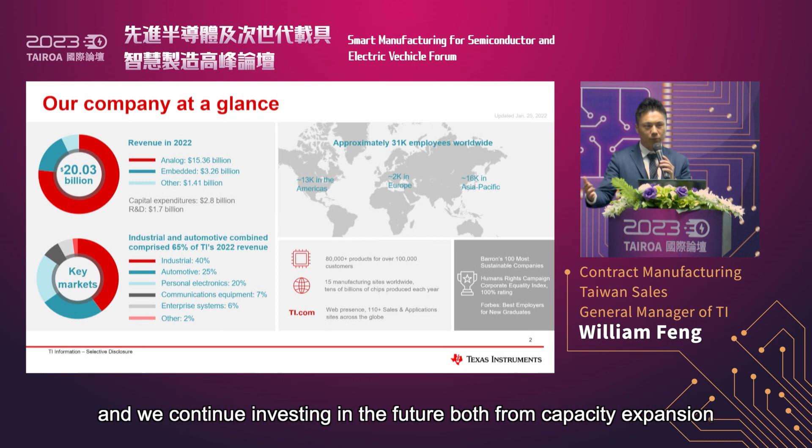Last year, TI ran 20 billion revenue, mainly from analog and embedded products. We continue investing in the future, both from capacity expansion and product technology expansion. We spent 8% of our revenue for R&D investment, and another 14% of our revenue into capital expenditure to enable the future.

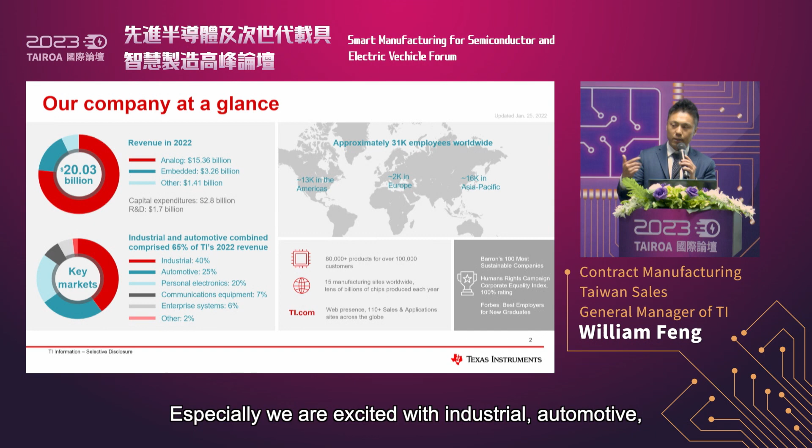We feel pretty good about the mix of business we have today, and we love the diversity of the market with our broad portfolio, from analog and embedded products. Especially, we are excited with industrial, automotive, enterprise, and cloud areas, just like the robotics or smart manufacturing we are talking about today, which is the trend of growth for the next decade. Meanwhile, we also invest across the markets where we see opportunity to grow and develop.

Earlier this year, maybe February 1st, we announced to the market that we will increase our capital expenditure to 5 billion per year this year and next year through 2026. People who know the market situation of semiconductors this year might feel like it's insane why you are spending a lot of money today.

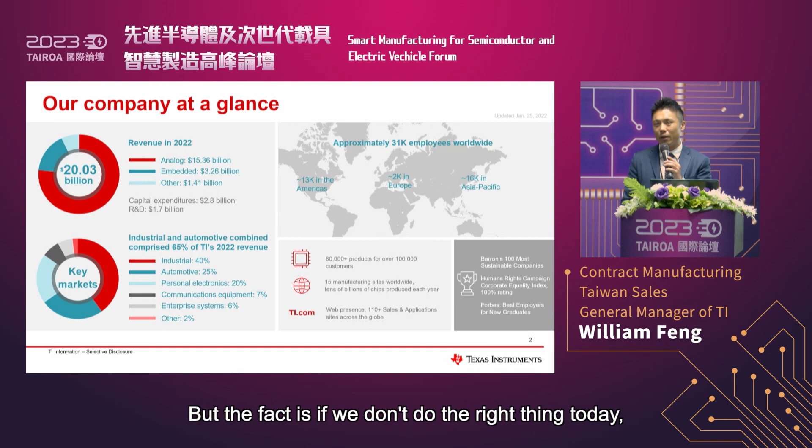But the fact is, if we don't do the right thing today, when we enable a new factory, the cycle time will need at least 3 years until it can deliver. So we continue investing in that, and actually we increased the capacity investment this year.

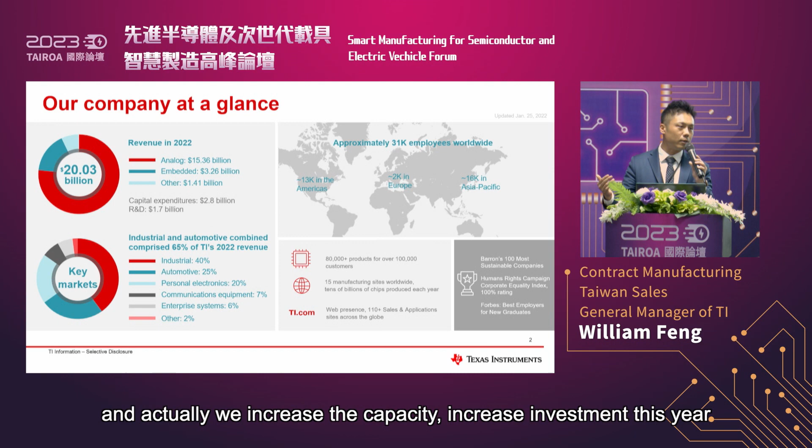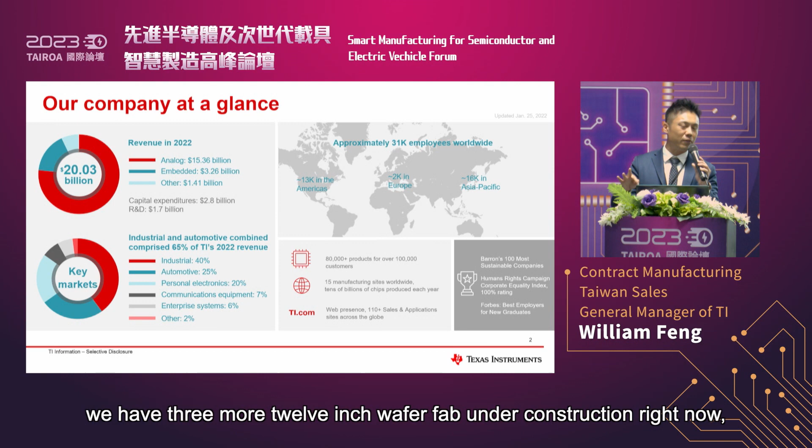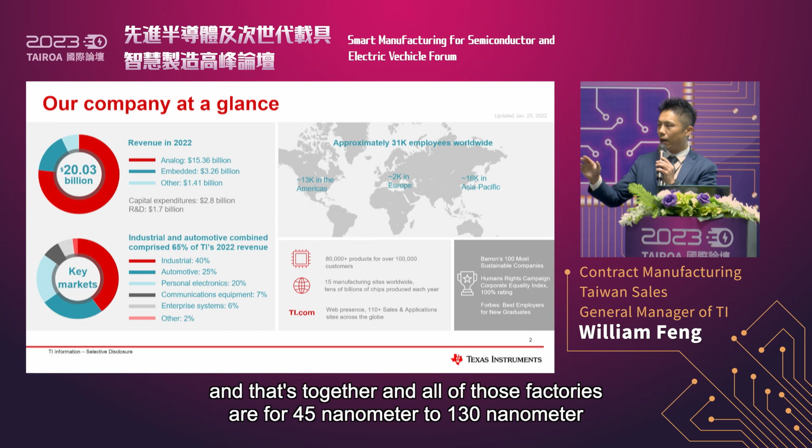We have 2 300mm wafer fabs just launched in production at the end of last year. We have 3 more 12-inch wafer fabs under construction right now, and another 2 12-inch wafer fabs in planning. All of those factories are for 45 nanometer to 130 nanometer, which is the process node we see with optimal cost, performance, power, and voltage level to enable analog and embedded products.

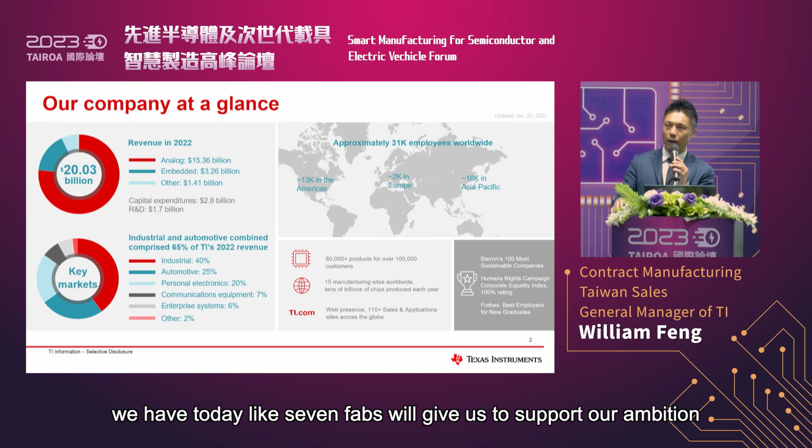Put together, those capacity investments we have today, the 7 fabs will support our ambition to become a 45 billion revenue company in 2030.

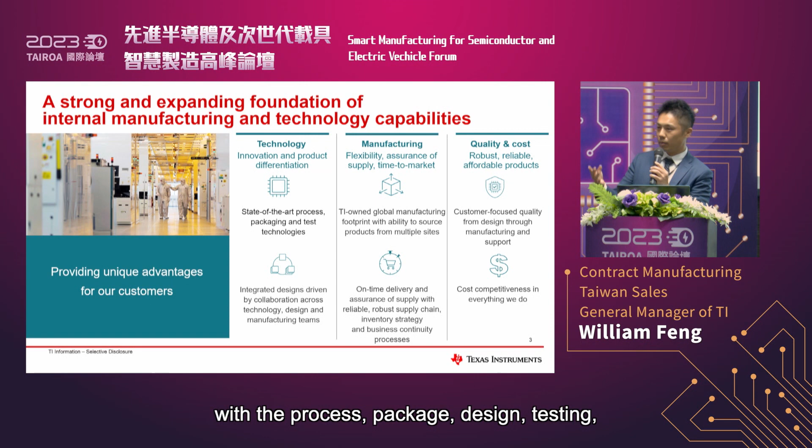And the expansion cannot just be at the capacity. We are expanding our foundation in technology and capabilities, with process, package, design, and testing, through all these efforts to drive innovation to enable a smarter, smaller, higher power efficiency, lower consumption, and more affordable semiconductor. That is what we are driving and developing.

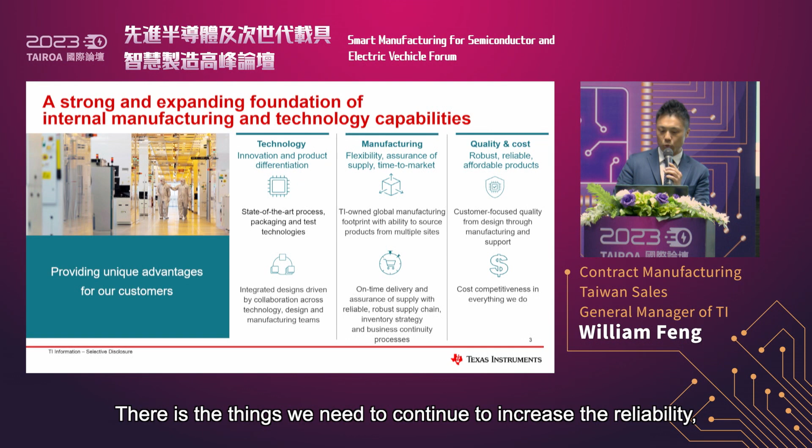With the capacity expansion, our goal is to build a flexible assurance of supply and time to market performance for our delivery and order fulfillment. And last but not least, the quality and cost. When we develop the technology, we need to continue increasing reliability and quality, and also make semiconductors more affordable to the market.

So today we talk about robotics and smart manufacturing. In fact, it's not a new thing in terms of robotics. 50 years ago, the first robot appeared in the world. That robot was good enough, precise enough, and performed well enough to help human beings increase efficiency in a factory, but it was also dangerous.

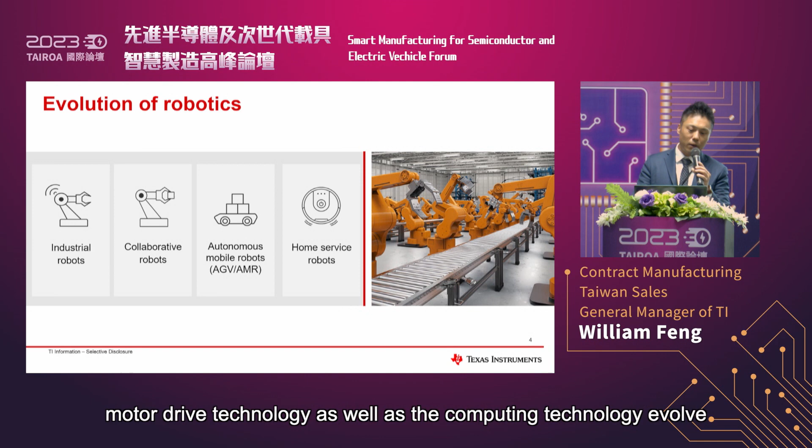With sensor technology, motor drive technology, and computing technology evolving to enable robots to be more collaborative, recently we also start to talk about AGV and AMR, with increasing capability in sensing, AI, and edge computing, enabling these robots to be smarter. Lastly, this innovation will not stop at the factory. Outside the factory doors, we already see smarter and better robots changing our life.

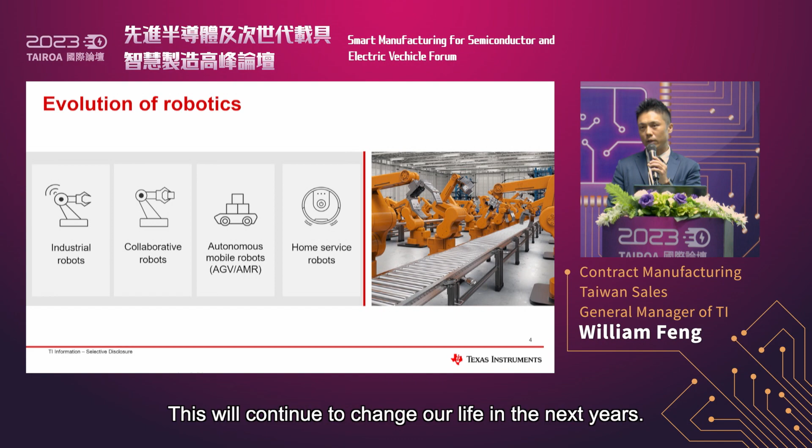We believe while this innovation continues to evolve, we can't even imagine how it will continue to change our life in the next years.

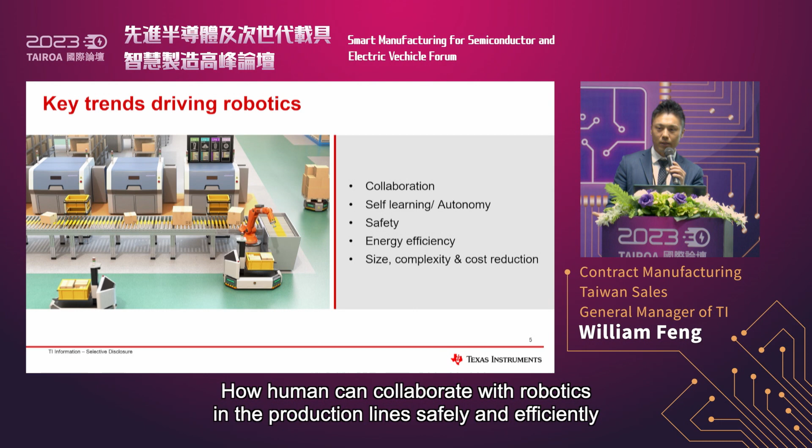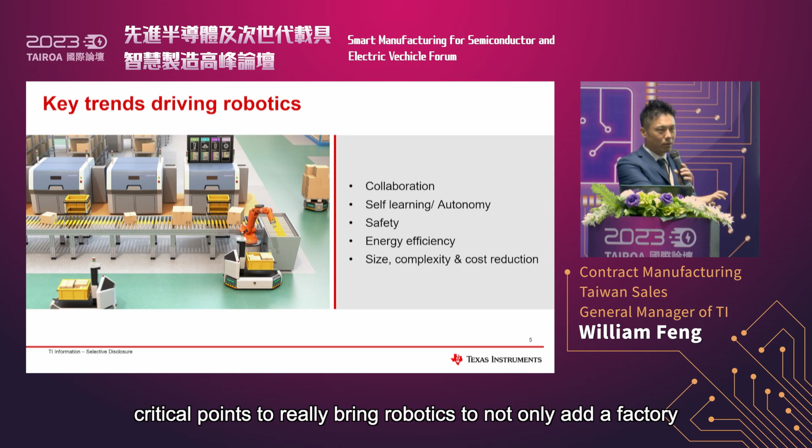There are 5 trends we are observing in robotics development. The first is collaboration, how humans can collaborate with robotics in the production line safely and efficiently. Second is self-learning and autonomy, driven by AI and edge computing plus the computing capability we've evolved in the world. Safety is certainly a must in the trend, and energy efficiency with the development of the battery, the BMS, and wireless connectivities is a trend that continues to evolve. Last but not least, there is size, complexity, and cost reduction. These are the critical points to really bring robotics not only to the factory, but everywhere that can help human beings down the road.

Right, so let me pause here. I will introduce Matthias, our expert on robotics from Germany, to give everybody a further talk on the trend of the technologies here.

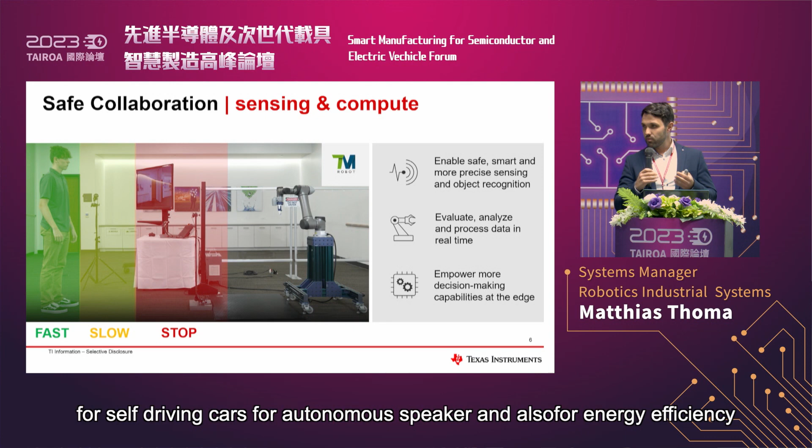My name is Matthias, and I'm working in TI in the so-called robotics systems engineering team. TI itself is a semiconductor company, so we will not develop robots ourselves. I want to talk about the products TI develops that enable current robotics and also the future of robotics. A lot of the trends we heard earlier for self-driving cars, for autonomous vehicles, and also for energy efficiency are also similar to what we need for the next generation of robotics.

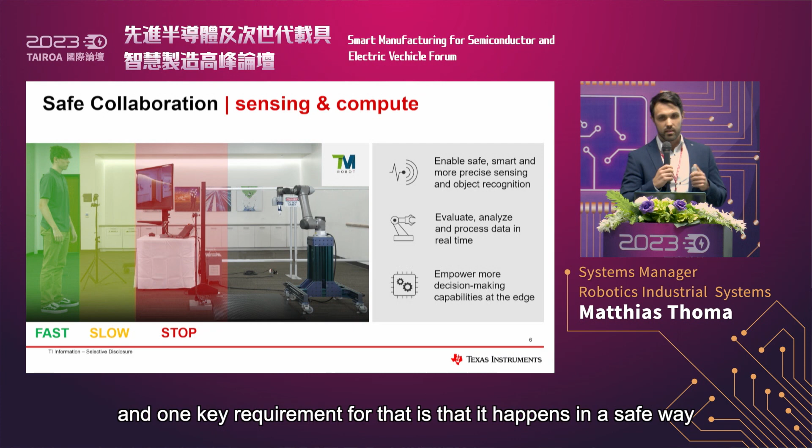So the first topic I want to talk about is collaboration, and especially safe collaboration between humans and robots. I think we all imagine in the future, the long-term case will be a factory where almost no human will be needed. But on the short term, the first step will be humans working alongside robots. One key requirement for that is that it happens in a safe way and also in an efficient way.

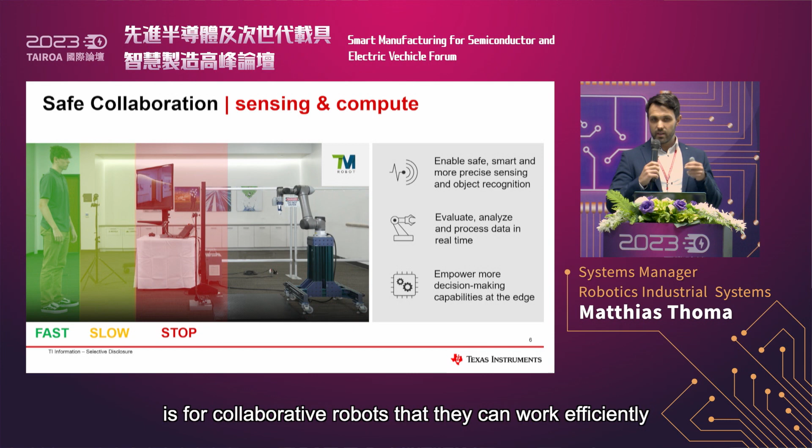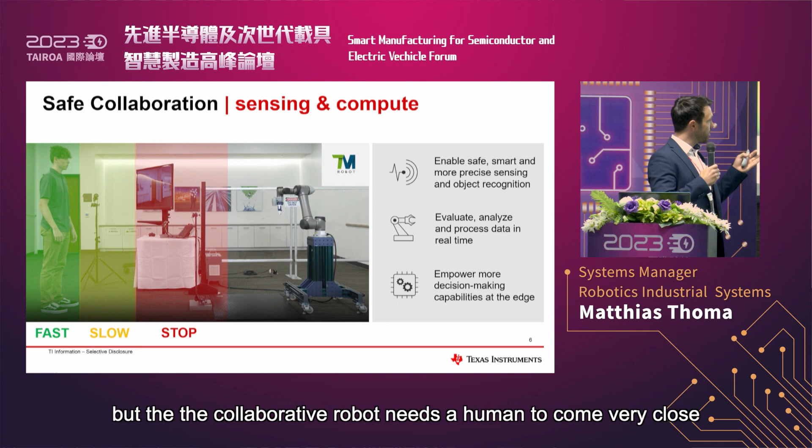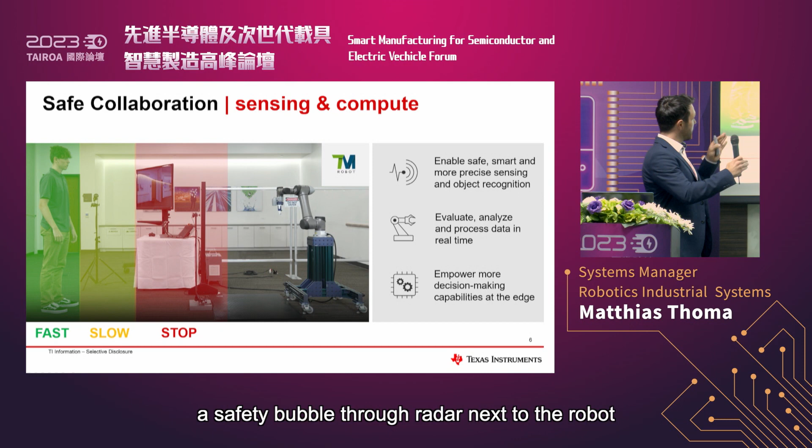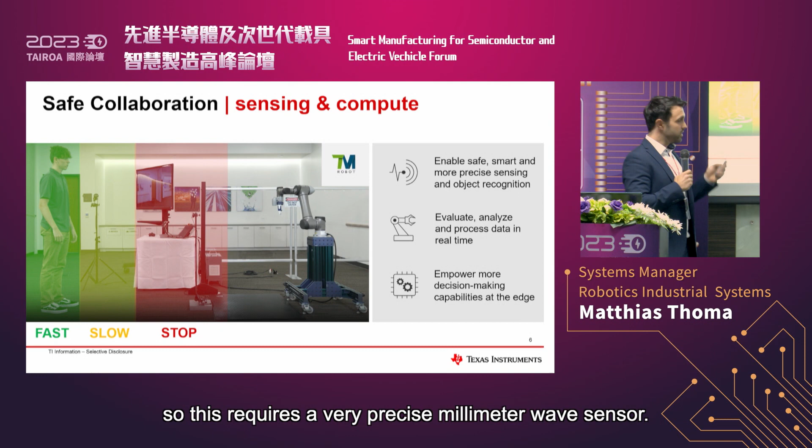One challenge right now is for collaborative robots to work efficiently, at high speed, and close to humans. One example here is the sensor technology we are using, a millimeter wave radar. In the past, the first generation of robotics was surrounded by a cage, but a collaborative robot needs a human to come very close, and we enable that with millimeter wave radar. What we do is create a safety bubble through radar next to the robot, defining different zones in front of it. There's a safe area when the human is far away, and as he walks closer we can slow down the robot, and only when he's really close will it actually stop. This requires a very precise and safe millimeter wave sensor.

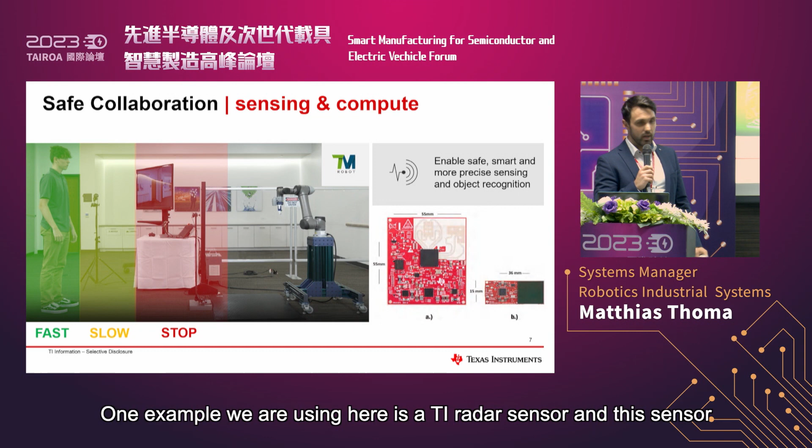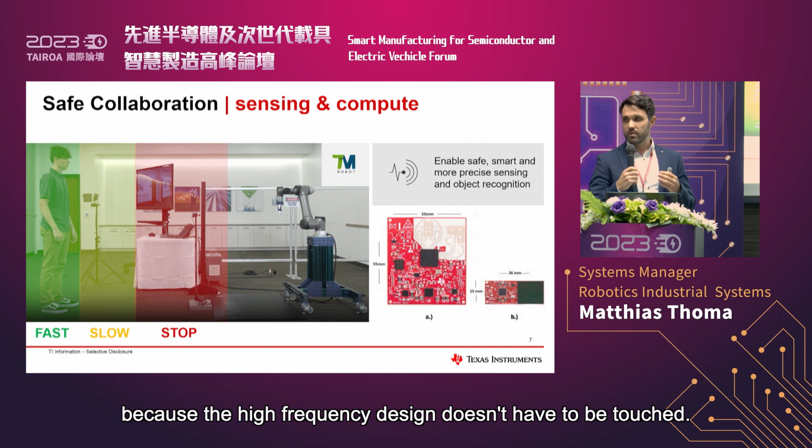One example we are using here is a TI radar sensor, which also comes with antenna on package options. That means it's easier to deploy because the high frequency design doesn't have to be touched—you can just have the antenna integrated. At the same time, the sensor comes with safety certifications, and we are running it on efficient processes so it comes at a lower cost in the future.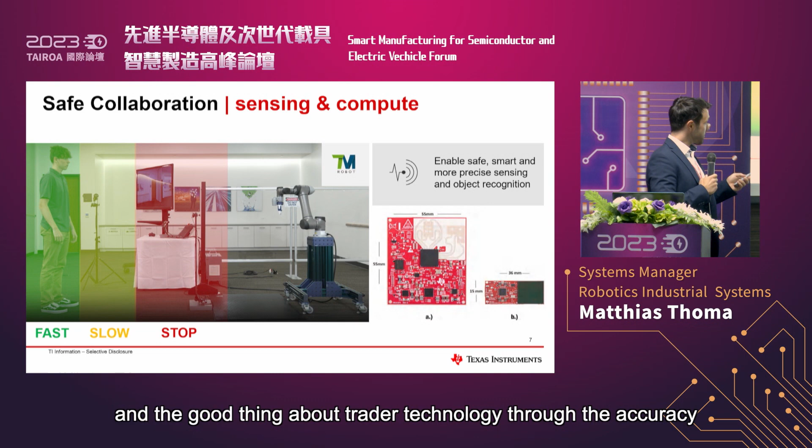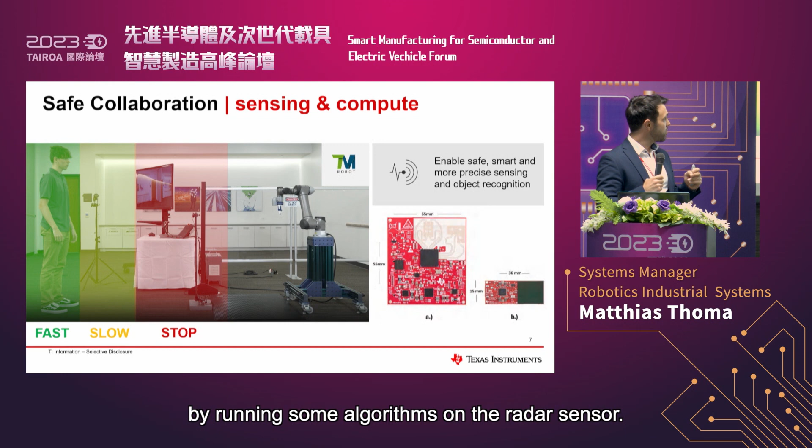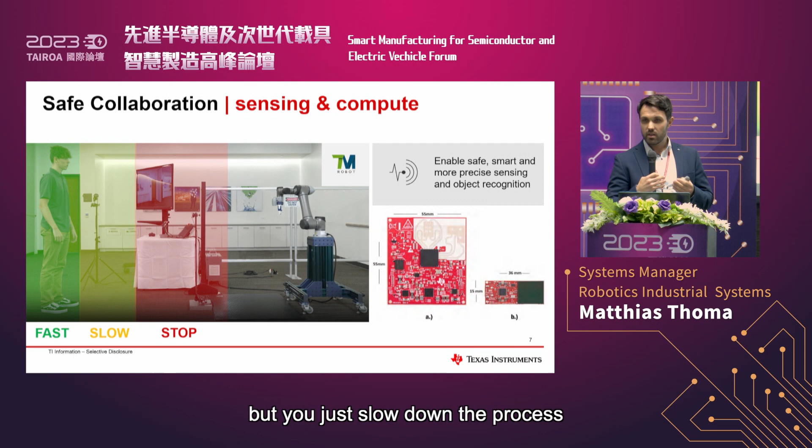The good thing about radar technology, through the accuracy you can get out of a radar sensor, is that you don't only detect if an object is coming closer, you can also differentiate what kind of object it is. By running algorithms on the radar sensor, you can differentiate if the object is, for example, a human or another robot. That means you can also increase the efficiency of your production, because you don't slow down the process when another robot comes close, but only when a human enters the area of the robot.

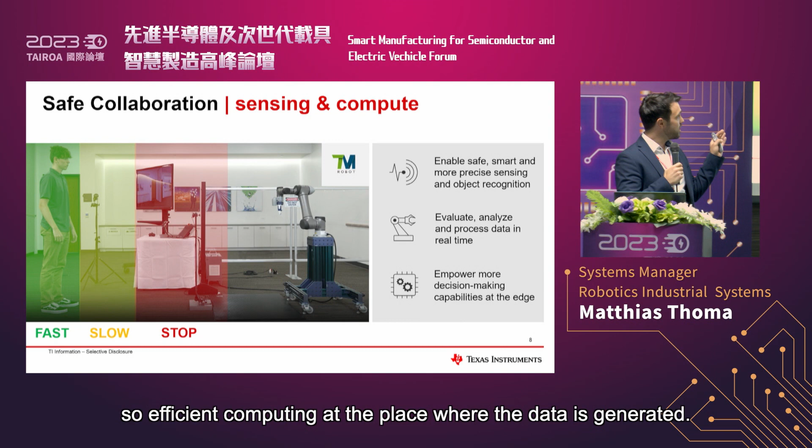Next to the sensing technology, radar is just one example. Processing is also needed, so efficient computing at the place where the data is generated. More new sensors also generate more data, and this data needs to be processed efficiently. So another big topic TI is focusing on is edge computing and AI computing.

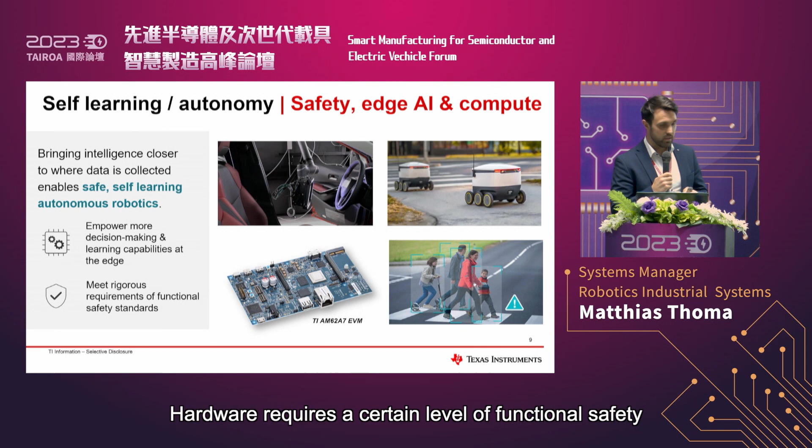And all of that for robotics has to happen safely. That means the processes and algorithms, but also the hardware and system level hardware, require a certain level of functional safety. And AI compute, we can already see today, has a lot of use cases for robotics.

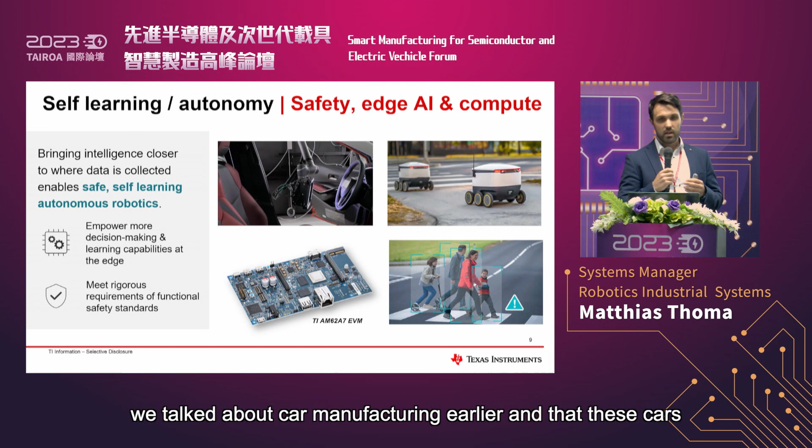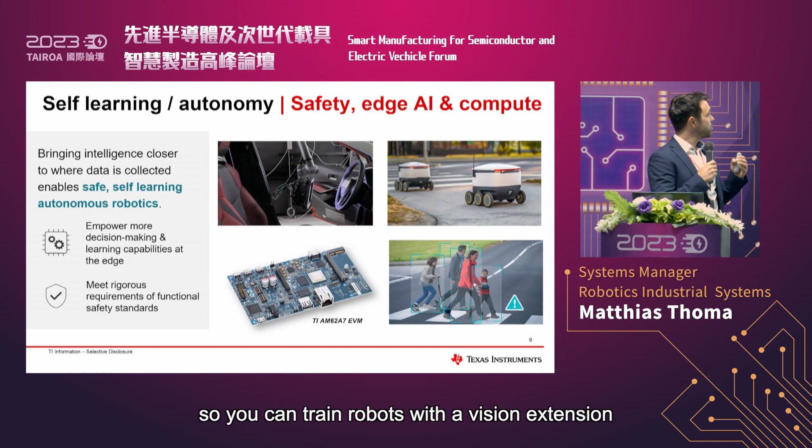One example we are showing here is visual inspection. We talked about car manufacturing earlier, and these cars need to be manufactured in a very accurate and precise way, so the inspection of the cars has to be done precisely too. You can train robots with a vision extension to do the inspection of the car, and ensure with the robots that the quality of your manufacturing is at the right level.

But it will not stop at just vision inspection, it will go beyond that. Robots will in the future be more and more able to perform tasks autonomously and on their own. This will be similar to self-driving in the future, when an autonomous robot can also drive on its own. And all of that also requires a lot of processing power.

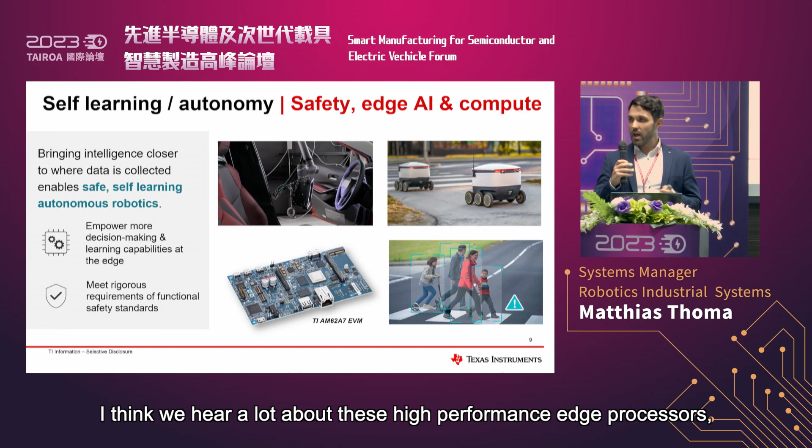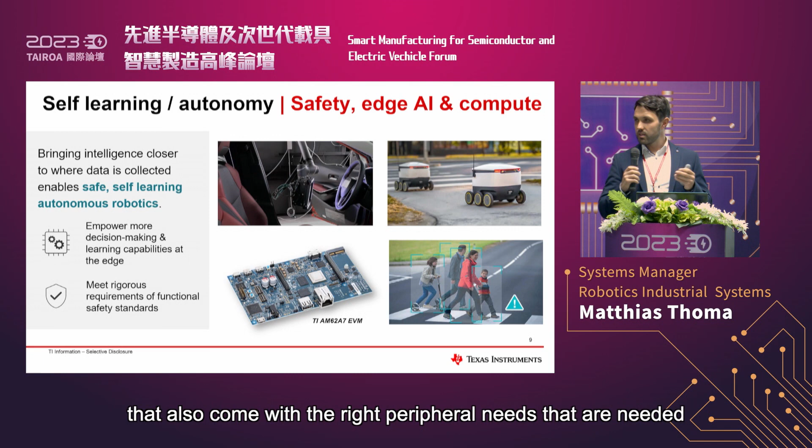The TI solution we are offering here, we are showing an example of one of our edge processor families. We hear a lot about high performance edge processors, but there are also lower performances that need to be computed at an efficient power level and a good cost structure. So we are offering a scalable family of edge processors that come with the right peripheral needs for connecting different kinds of sensor types for robotics.

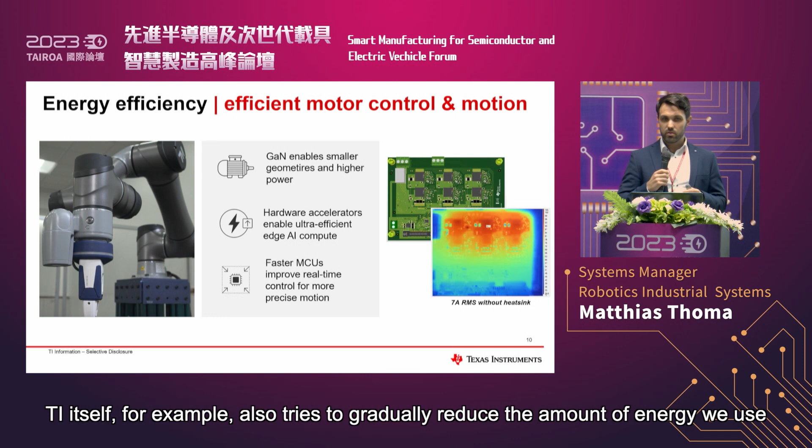Another topic affecting robotics is energy efficiency. We talked about reducing the greenhouse emissions of the cars, right? It also means reducing the greenhouse emissions of the factory itself. Since more robots and more machinery are installed in factories, that means these machineries need to reduce energy consumption. TI itself, for example, tries to gradually reduce the amount of energy we use in our semiconductor manufacturing, and we also use a lot of robots, so getting more efficient robots will help us decrease the energy usage of the manufacturing.

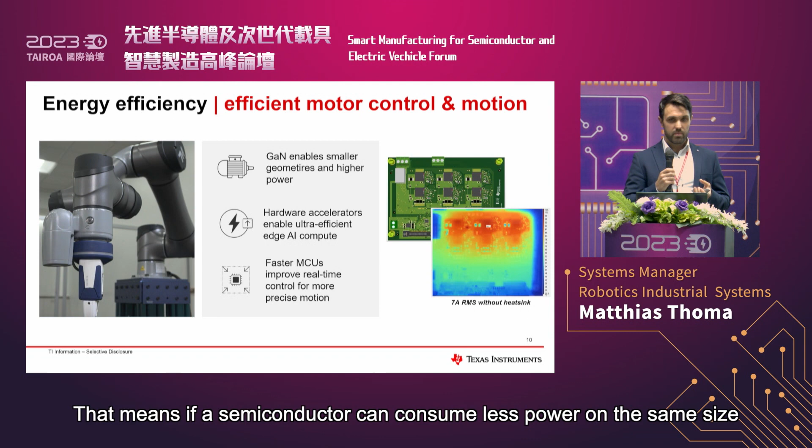Energy efficiency, on the other hand, enables new types of robotics and also new architectures of robotics. If a semiconductor can consume less power in the same size, or if I can reduce the size of my semiconductor package needing the same power, or if I can remove the heatsink, I can also build new architectures of robots or build my robots more efficiently.

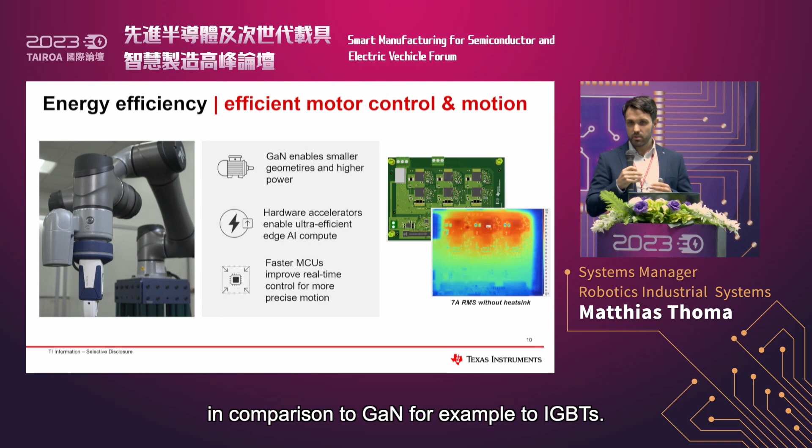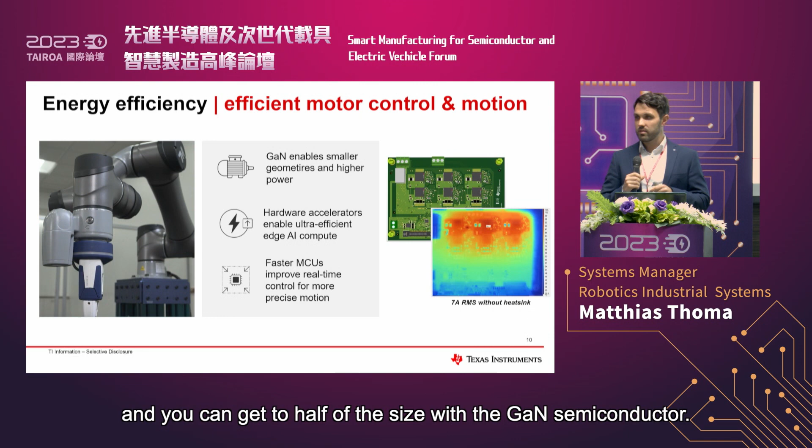One example we are showing here: earlier we heard about IGBT and GaN, and TI is investing into GaN technologies, which can be used in different areas in robotics. One is the inverter stage, the motor. Compared to IGBTs, GaN can reduce switching losses by 80%. At the same time, compared to a classic silicon MOSFET, you can get to half the size with a GaN semiconductor. This enables much smaller power stages for the robots.

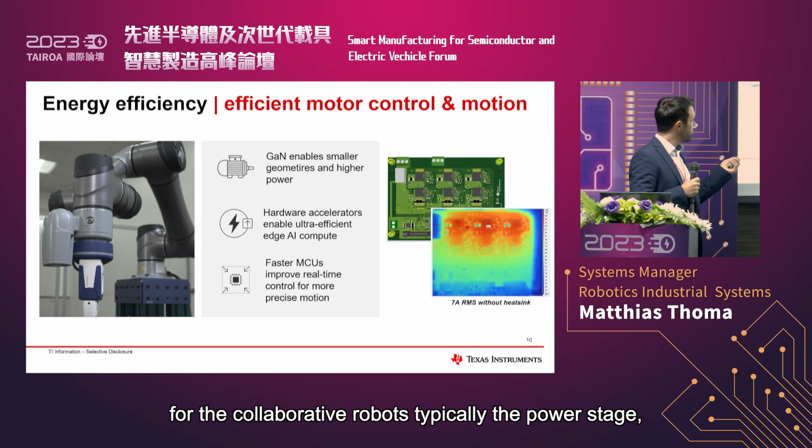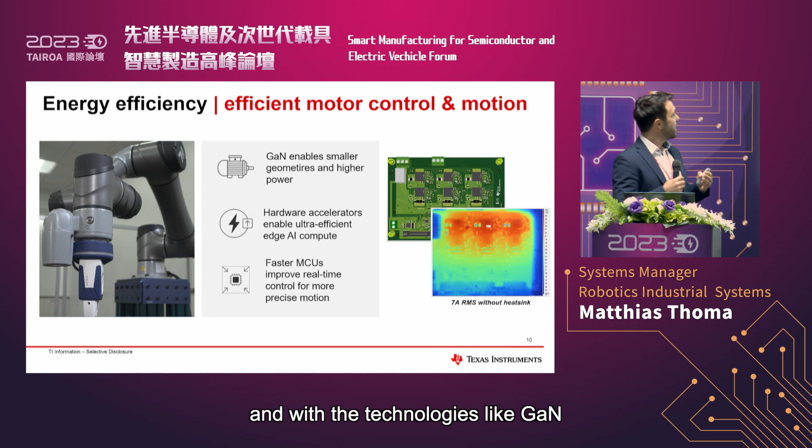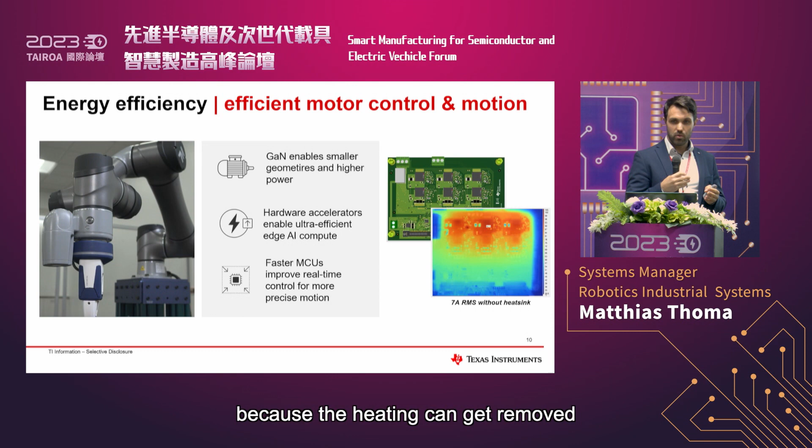For example, for collaborative robots, typically the power stage is within the joints of these robots, so there are motors in each joint, and also the power electronics is in the joints. With technologies like GaN, heavier payload robots can be built this way, and the cost of these robots can be reduced because the heatsink can be removed, or the amount of weight the robot needs can be reduced.

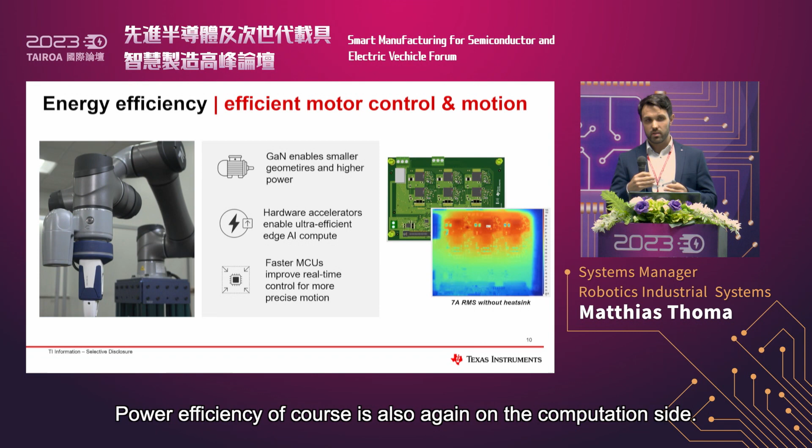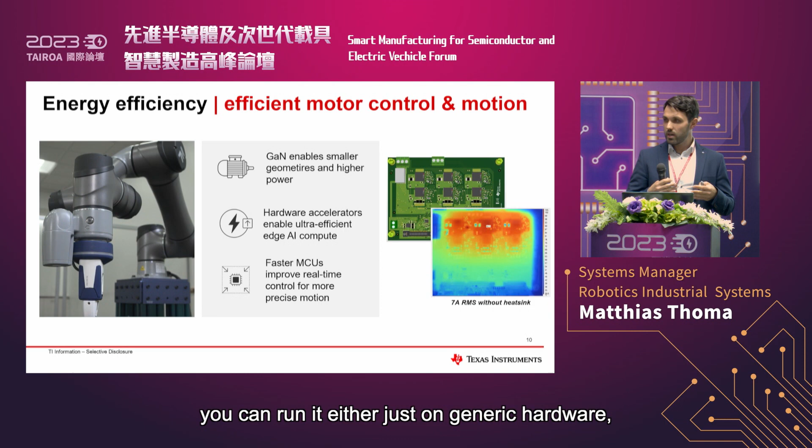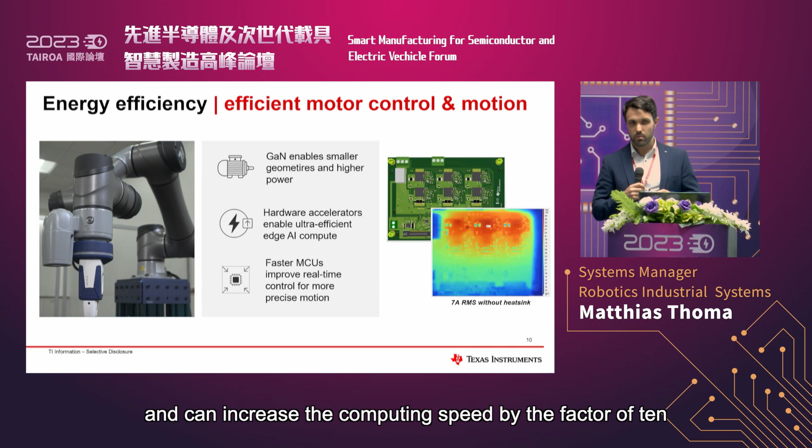Power efficiency is also important on the computation side. We talked about AI models, and for the AI model you can run it either on generic hardware, or there's specific hardware built to run AI efficiently. We integrate dedicated AI accelerators on these edge compute processors that can reduce the computing power and increase the computing speed by a factor of 10.

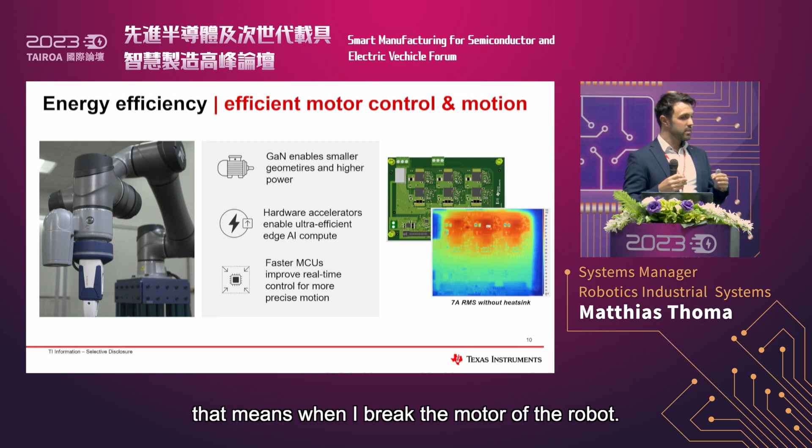Another area where GaN can be used is regenerating the energy of the robot. A robot performs a lot of fast movements with starting and stopping. With GaN you can build bidirectional DC-DC converters. That means when I brake the motor of the robot, similar to braking the motor of a car, I get regenerative energy from the motor, and this energy I can reuse and feed back either into a big battery or into my energy grid. This increases the power efficiency of the robotics itself.

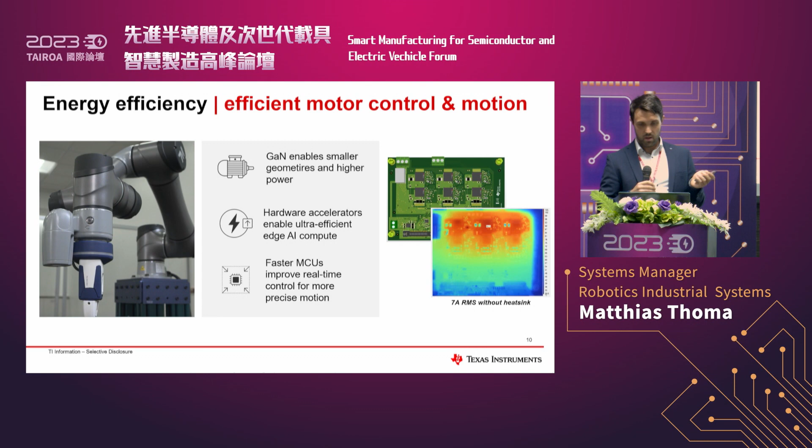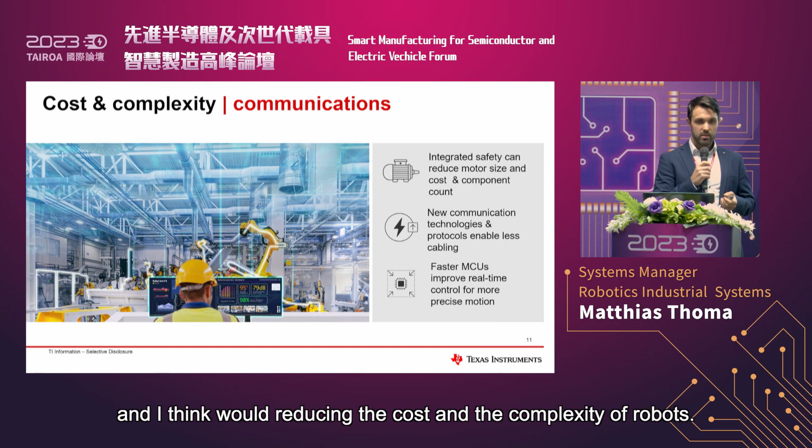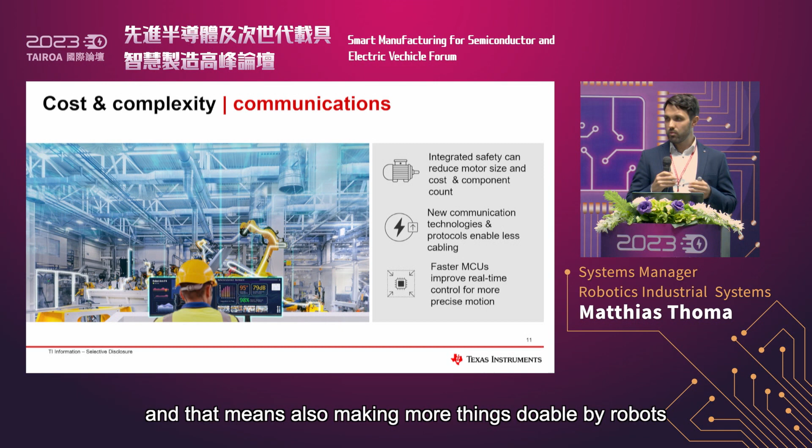Another example is overall reducing the cost and complexity of robots. William already touched on the new applications that robots can do, and reducing cost and complexity means making more things doable by robots. If the robot has a better cost structure, there are more applications I can automate with it, and maybe in the future, with a good cost structure, I could even use a robot at my home.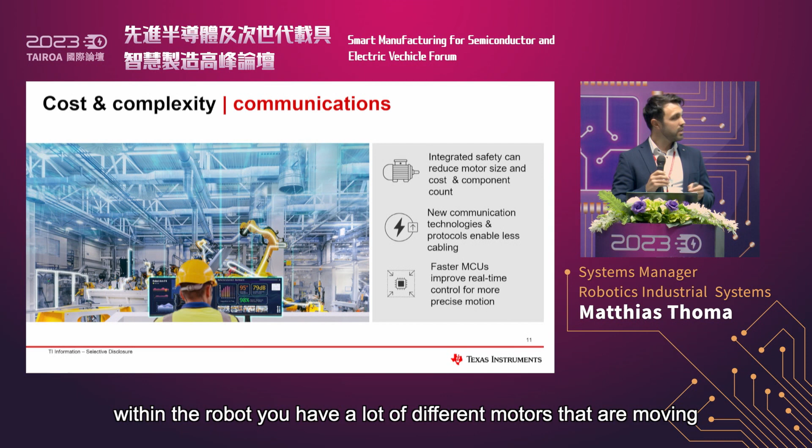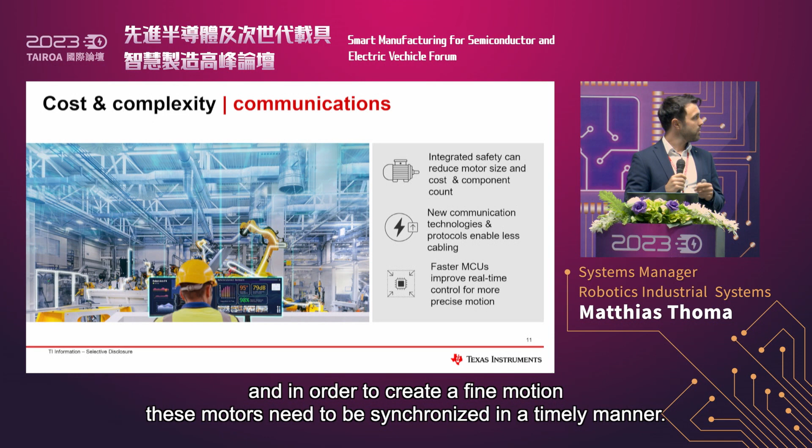One example of reducing robot cost is communications. Within the robot you have a lot of different motors moving, and to create fine motion, these motors need to be synchronized in a timely manner. There are communication protocols and physical communication layers like Ethernet that run on wires.

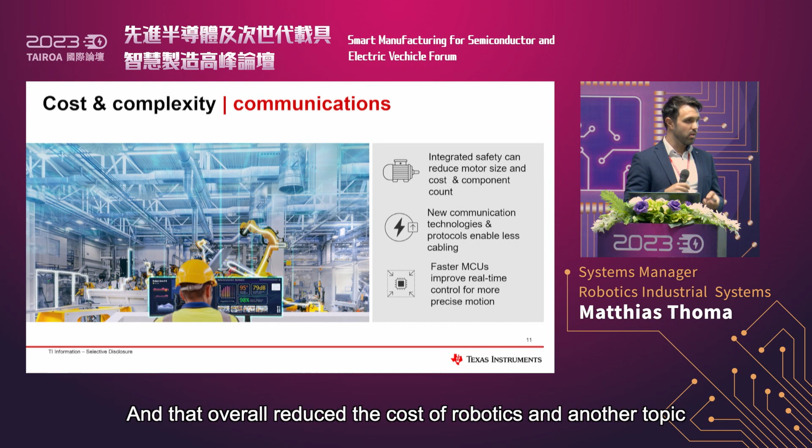One trend TI is supporting is single pair Ethernet. With single pair Ethernet, you can reuse just two wires for communication and also for your power level. That means the robot with different joints I was showing earlier, in the future, could use just one pair of wires to let power flow through the robot, but also let communication flow through it. This overall reduces the cost of robotics.

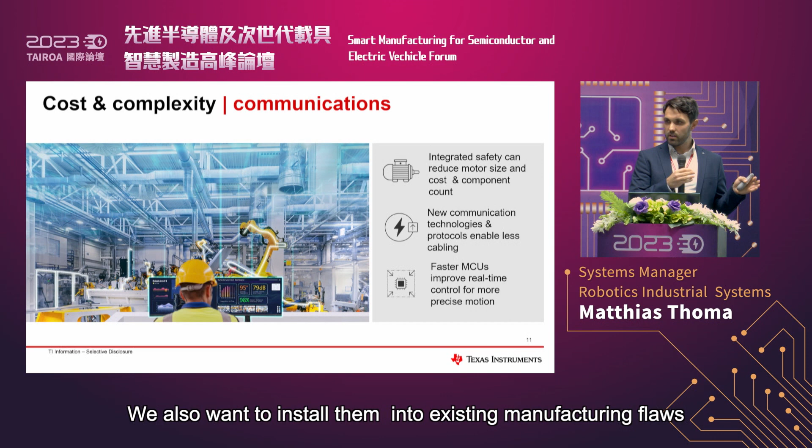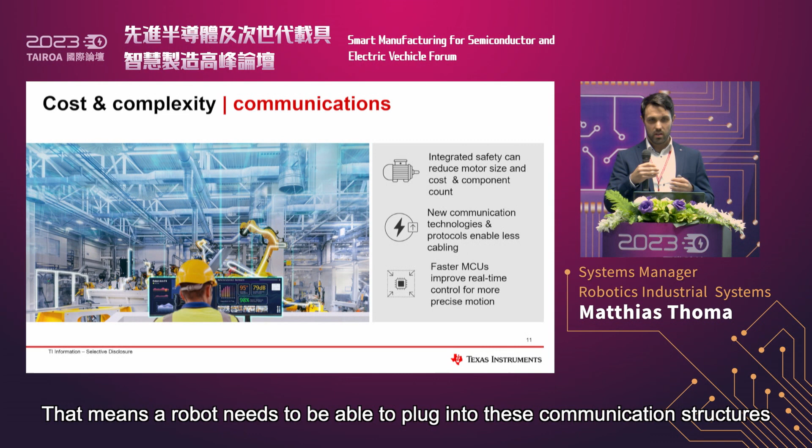Another topic: since we now have collaborative robots in factories, we want to install them into existing manufacturing flows. Existing manufacturing flows already have an existing protocol layer and communication structure. That means a robot needs to be able to plug into these communication structures and function or communicate with the factory grid, and every factory grid often has a different communication structure.

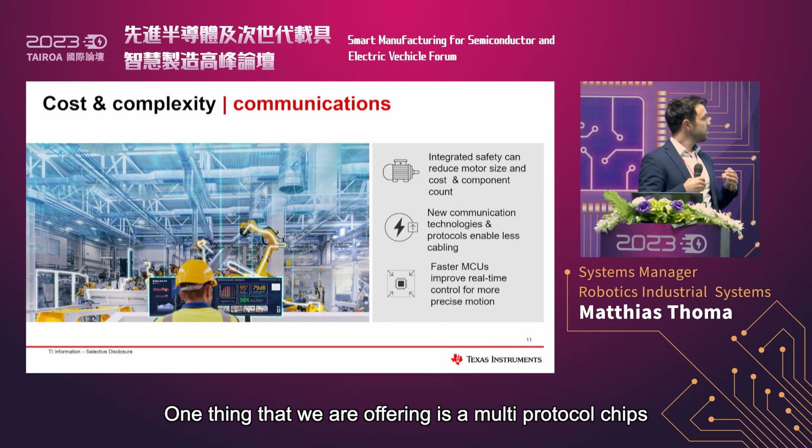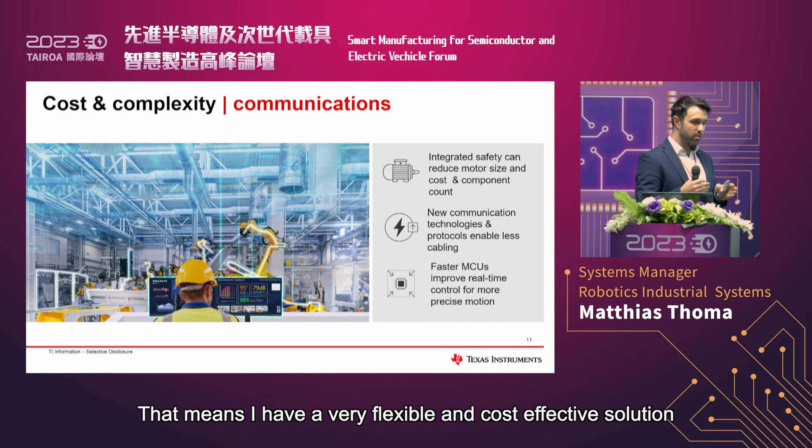One thing we are offering is multi-protocol chips. That means I can take the same solution and connect different protocol stacks to it, giving a very flexible and cost-effective solution to connect my robot to different kinds of factory structures and meet it at the right cost.

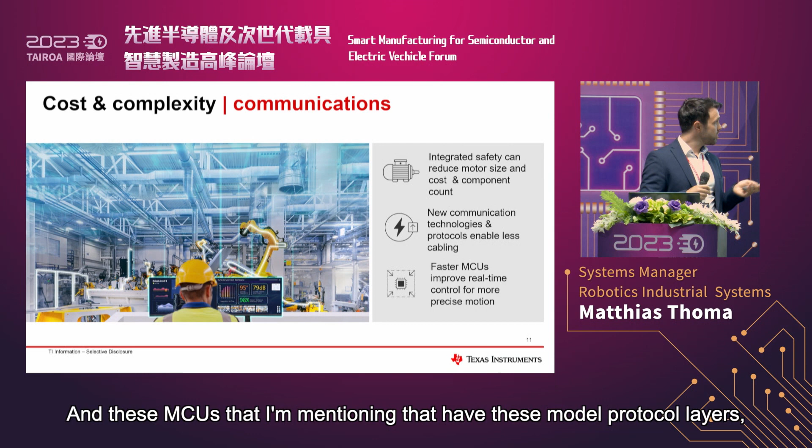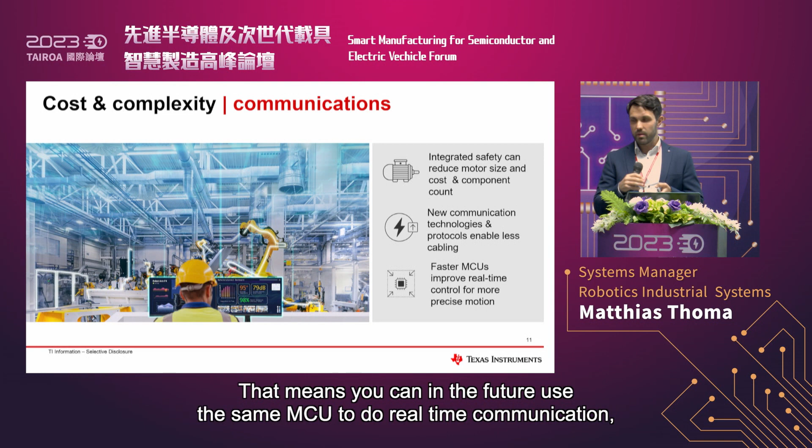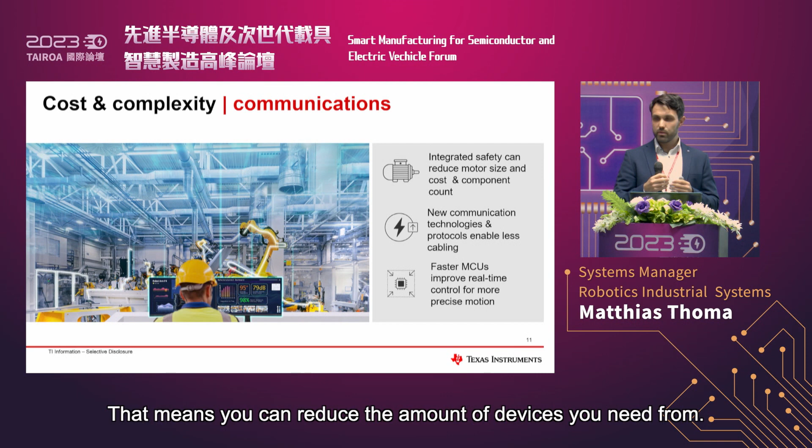These MCUs with multi-protocol layers still also have a lot of real-time functionalities equipped. That means you can use the same MCU to do real-time communication, and it also comes with peripherals needed for motor control. So you can reduce the amount of devices needed from several different MCUs down to one single MCU that can do both communication and motor control.

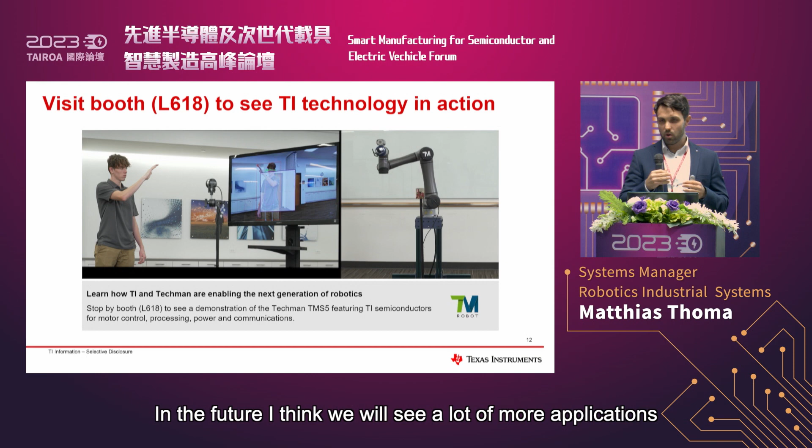So those were the different topics I wanted to touch on regarding how TI can enable the next generation of robotics. I think the future is just starting right now. We will see a lot more applications where robots are used, and a lot of new innovative semiconductors that can enable this next generation of robots.

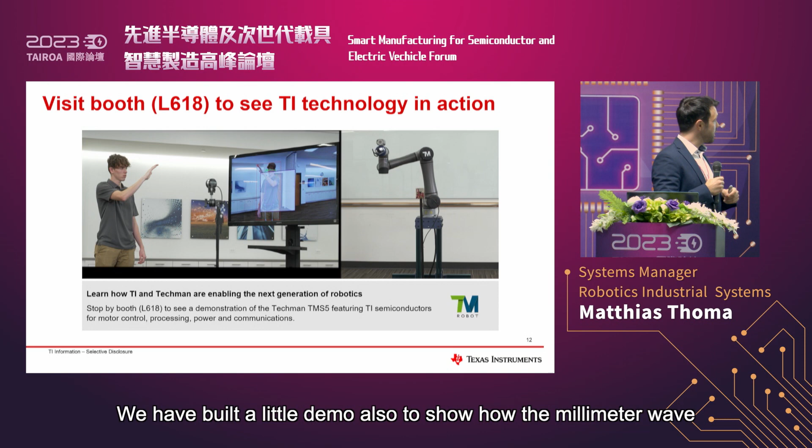We've built a little demo to show how millimeter wave and an edge processor running an AI model work together. We are working with our partner Techman Robot, and we're showcasing this at the Techman booth, location L618. I invite you to come over the next days, take a look, and discuss with us how this can automate your application.